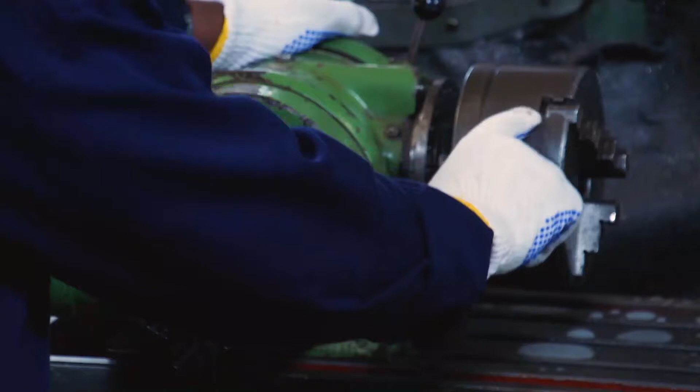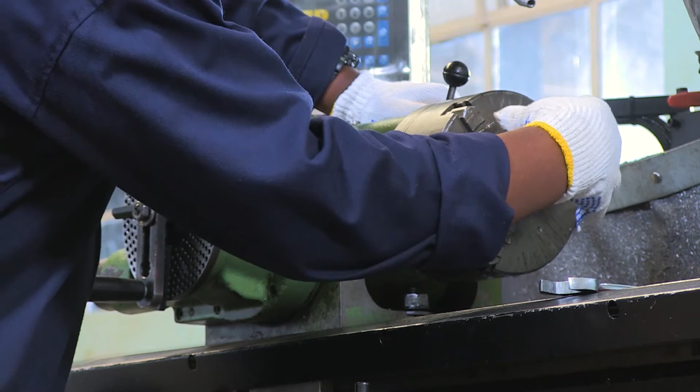So the elements of the dividing head: this part is the dividing head. Here we have what we call the dividing head, and this part is called the spindle of the dividing head, where you fix the job. Do you see these jobs like the lathe machine has? It's the same. Here is where we fix the job.

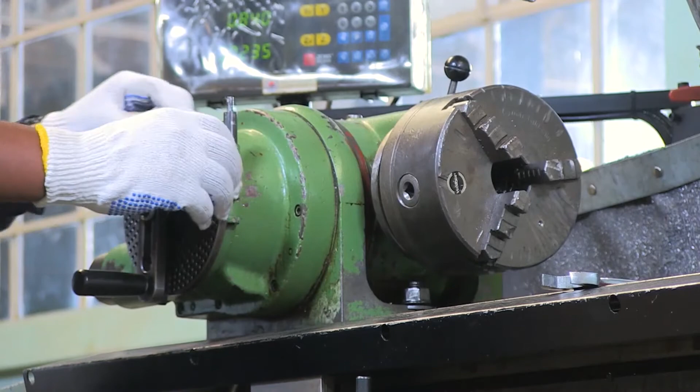And also here we have what we call the indexing plate, a very important part of the dividing head which is used to calculate or account for equal spacing. And here we have what we call the crank pin. This part is used for transmitting the motion via the worm shaft to the worm gear, then we get the output motion, but some calculation you have to look at before. And also here we have the dividing lock. After dividing, you lock the dividing head to avoid rotation during the cut. So those are the main parts of the dividing head.

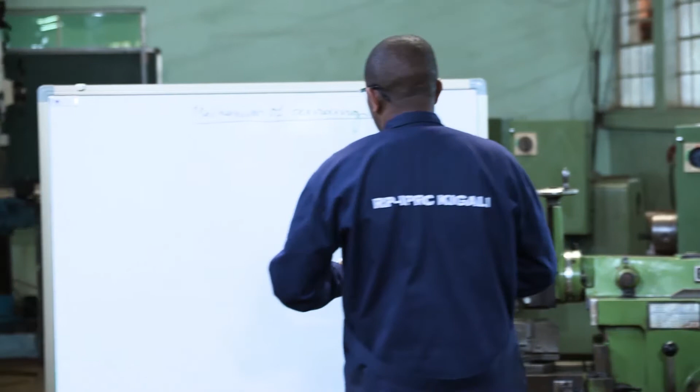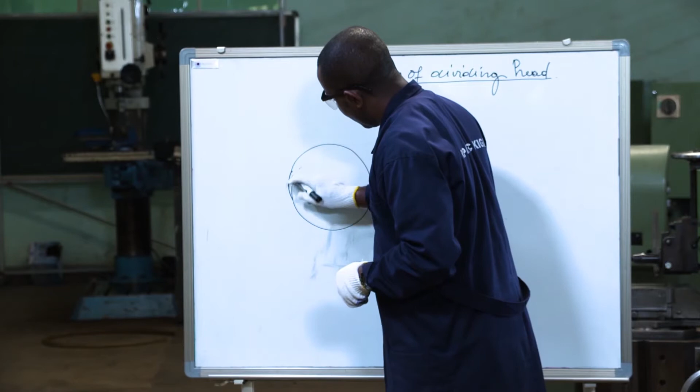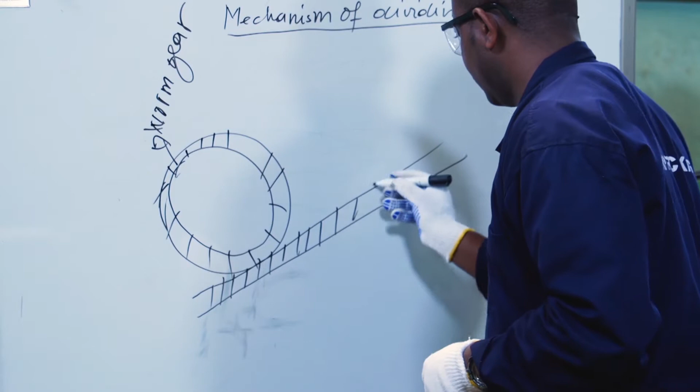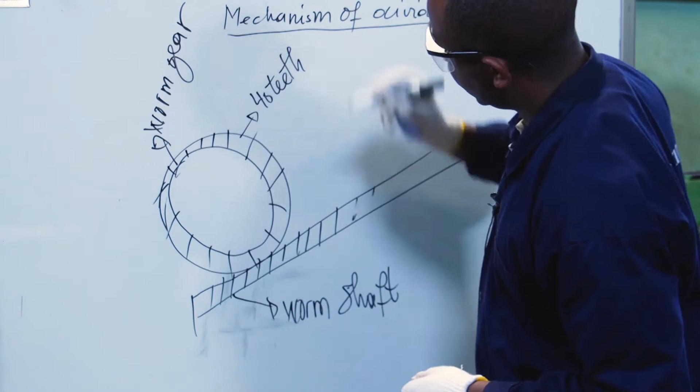Now we're going to see how the mechanism of the dividing head works. The dividing head is composed of the worm gear, which is engaging the worm shaft. This is called the worm shaft. This worm gear has 40 teeth of transmission. Here is where we have the dividing head spindle, of course with the indexing plate mounted on it.

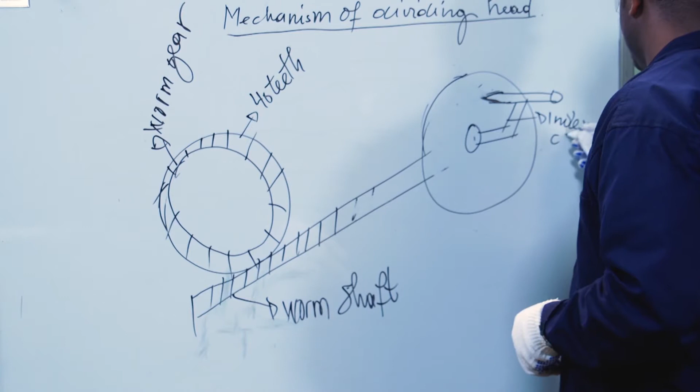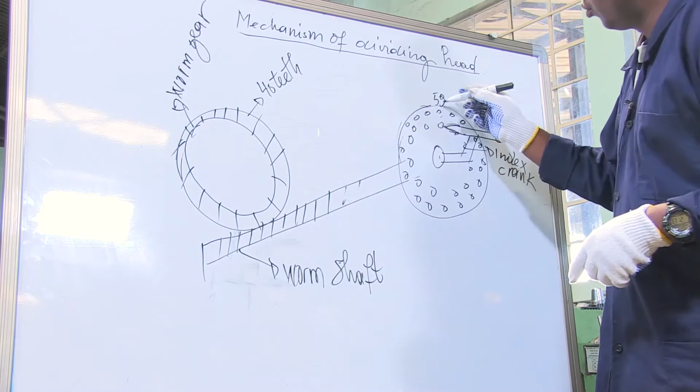Index crank. Here there is the indexing plate hole. Maybe this circle hole has 59 holes and so on. This means that when you turn one turn of the index crank, it causes the spindle to rotate 1/40 of the spindle head.

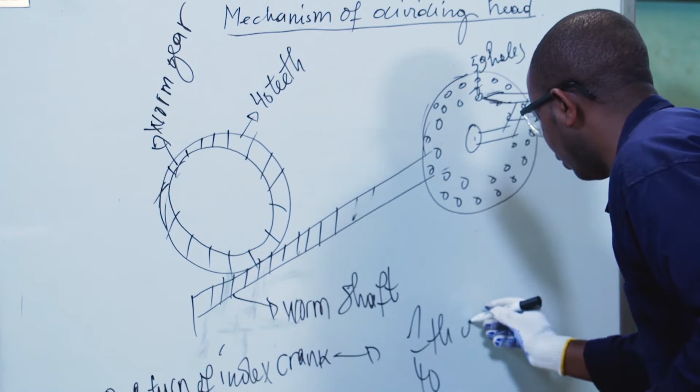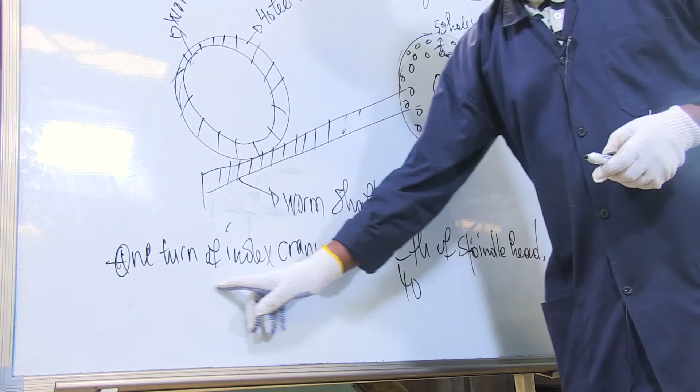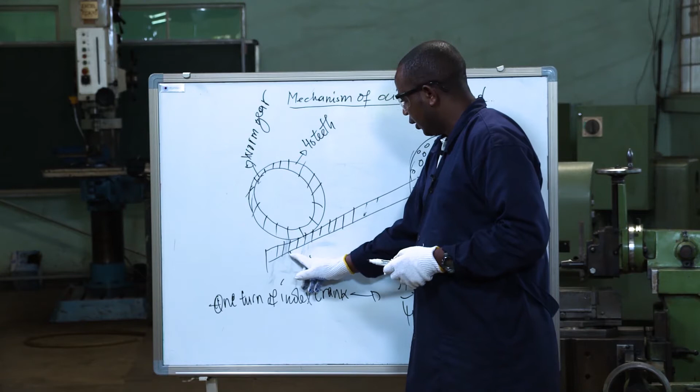This is the main principle, the main working principle of the dividing head. It means that when you turn the index crank, one tooth is engaged to the single thread worm shaft. That's why one turn of the index crank causes the spindle to rotate 1/40. This means we can deduce the general formula.

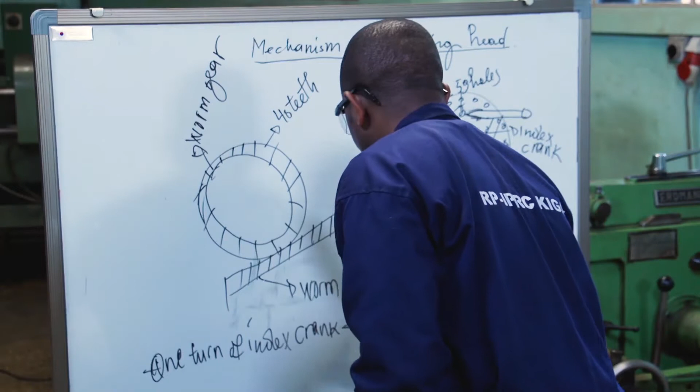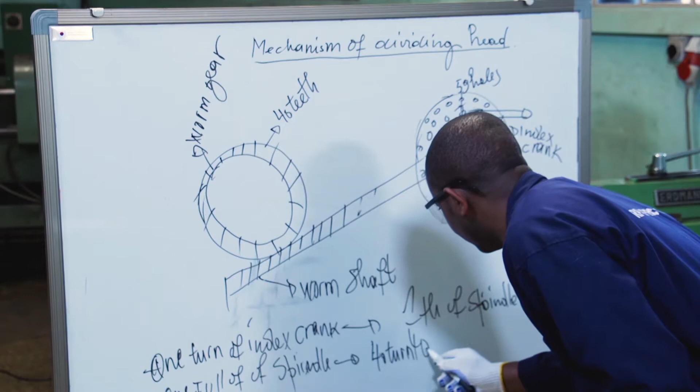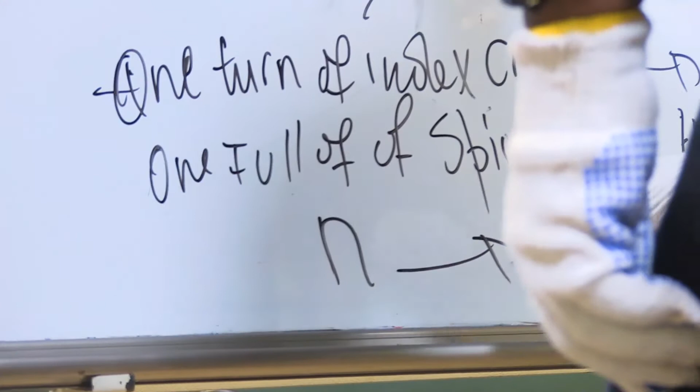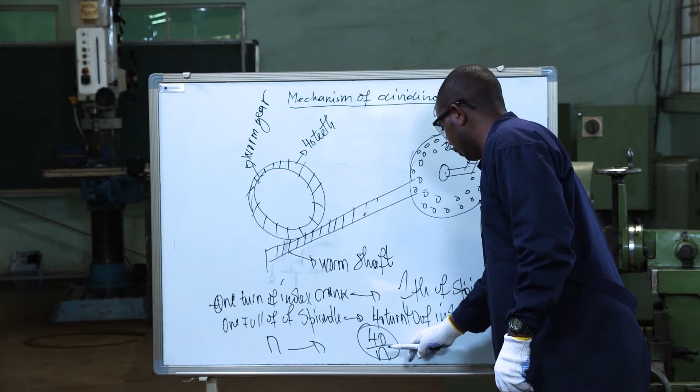One full turn of the spindle comes from 40 turns of the index crank. Then for n turns, we can deduce the general formula: the n division comes from 40 over n, where n is the number of divisions. This is a simple indexing method, as applied apart from direct indexing. 40 over n, n is the number of divisions.

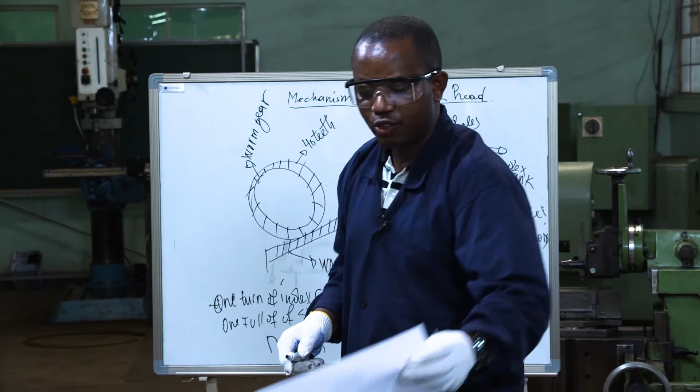So the task we have is to produce hexagonal head bolts, meaning we have 6 equal sides. So we can calculate.

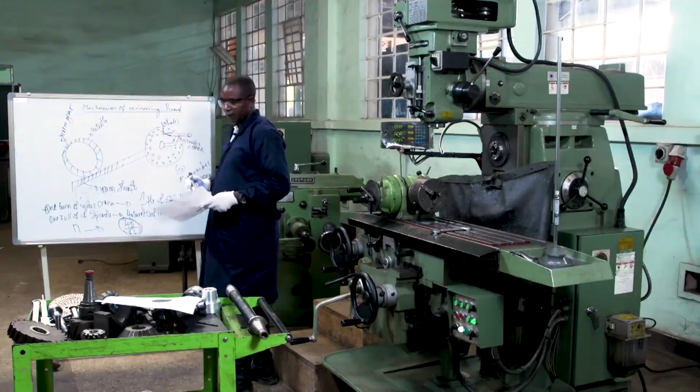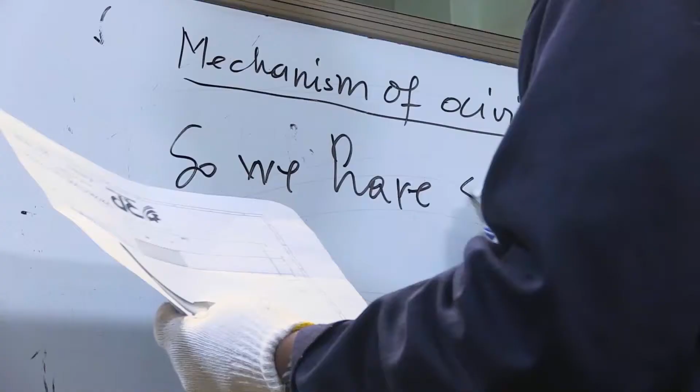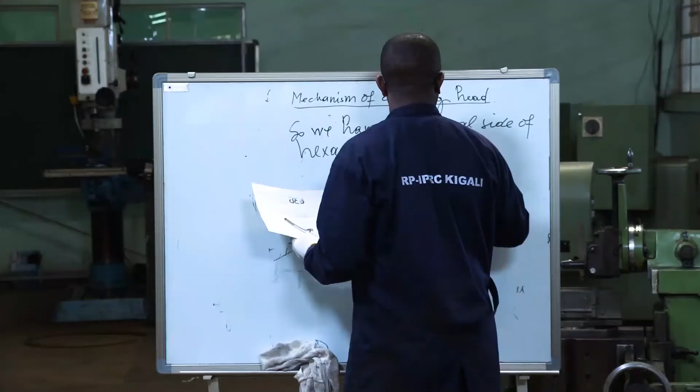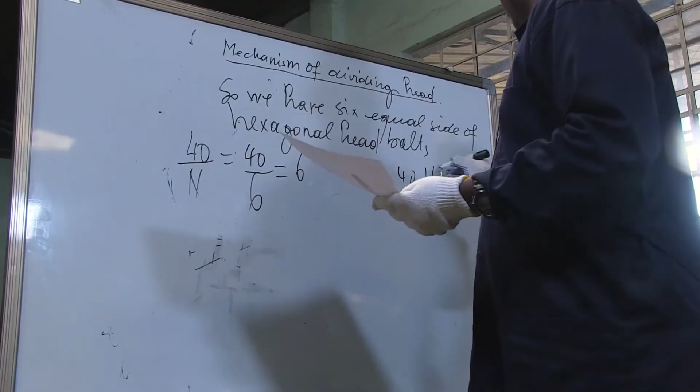So we have 6 equal sides of hexagonal head bolt. The formula says that simple indexing method 40 over n, I explained where, means that 40 over 6, because we have 6 equal sides, the number of division. Then we get 6 and 4 over 6. Here, never write a decimal number, a fraction of a fraction.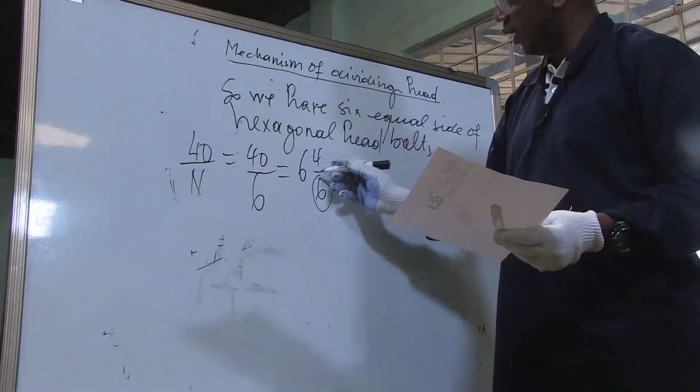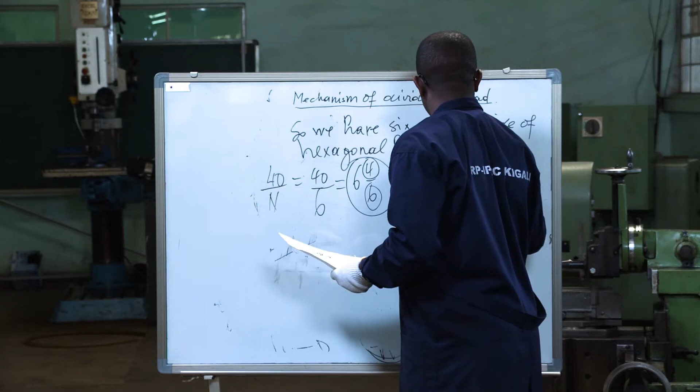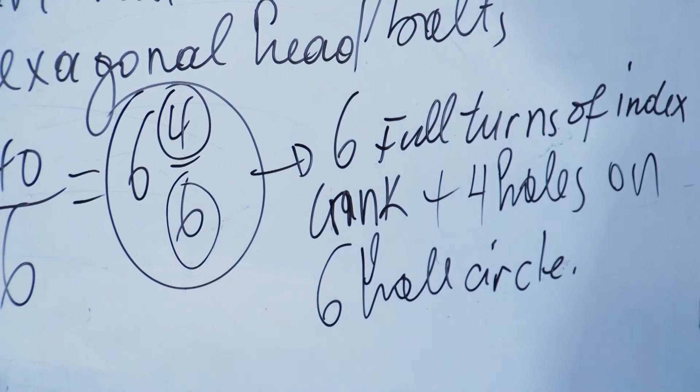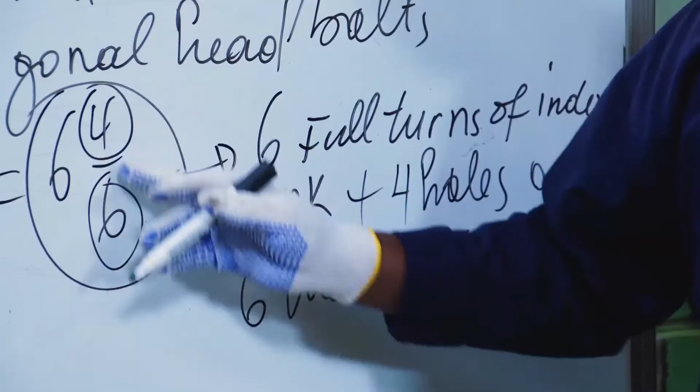It's very critical because there is a meaning of this denominator and a meaning of this numerator. We can interpret this: it means that 6 full turns of index crank plus 4 holes on 6 hole circle. I can explain more of that. So this fraction, 4 over 6, means 6 full turns of index crank plus 4 holes on a 6-hole circle. That is the meaning of this fraction.

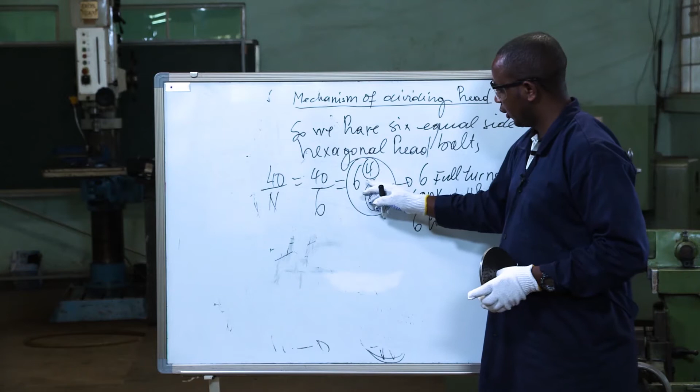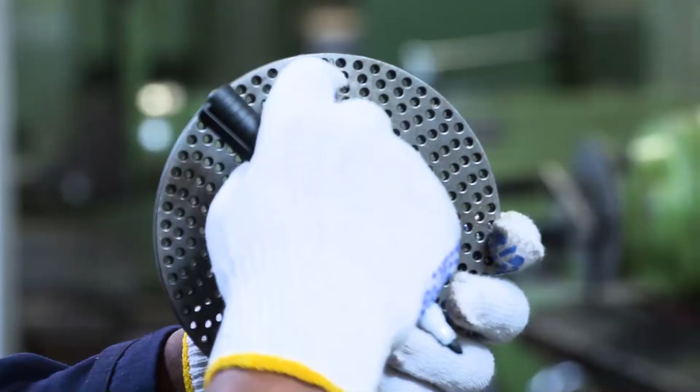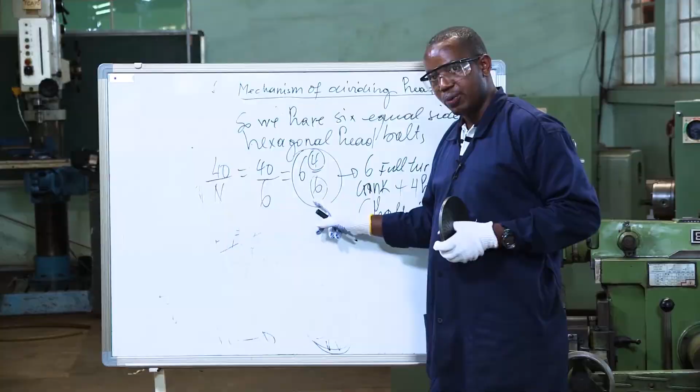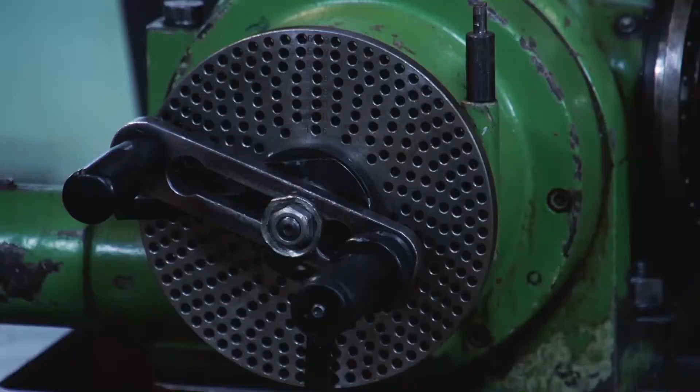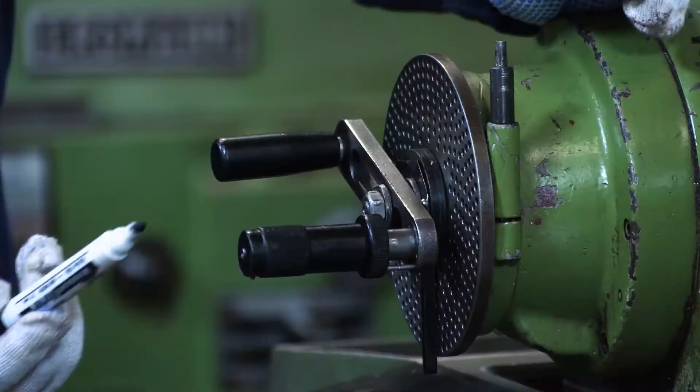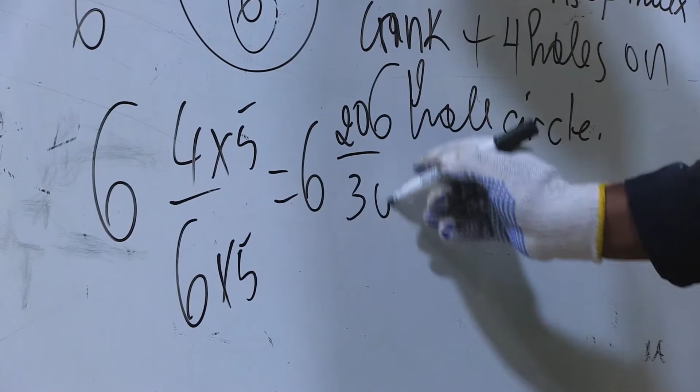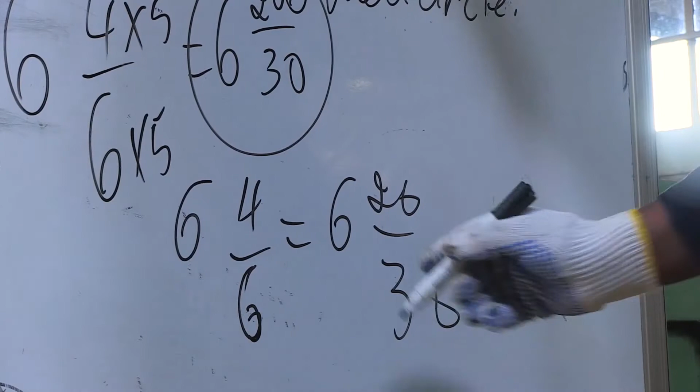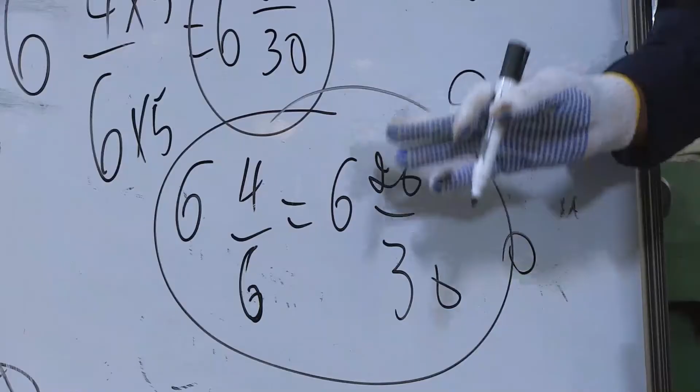Cycle hole means that we multiply both numerator and the denominator by 5. We get 6 20 over 30. 6 4 over 6 is equal to 6 20 over 30. This is my question: 6 4 over 6 is equal to 6 20 over 30. This fraction is equal because when we simplify by 5 and 5, we get 4 over 6.

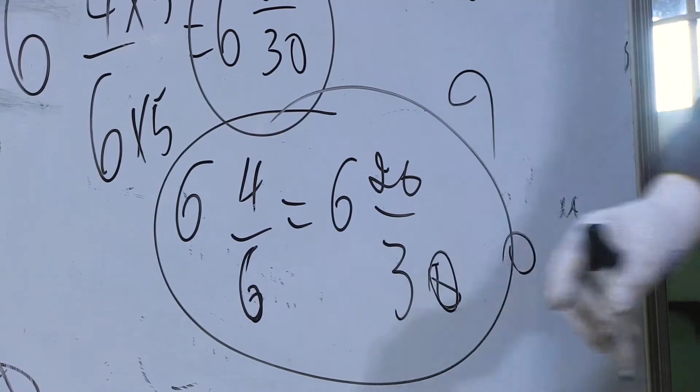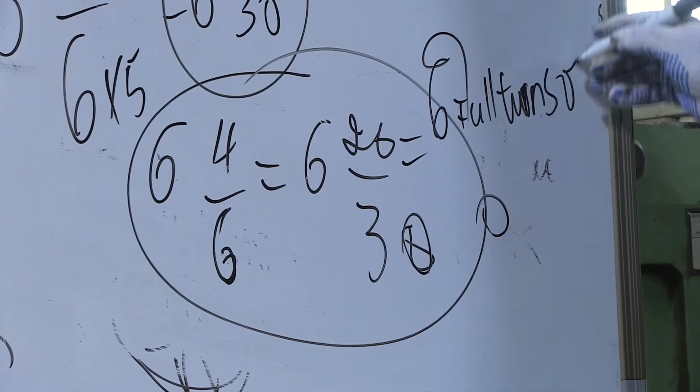There is no change, but there is a possibility of selecting the hole circle based on the availability of the indexing plate. We can apply this fraction, but there is no change for calculation, only to match with the availability of the indexing plate in our workshop. This means 6 full turns of index crank plus 20 holes on 30 hole circle.

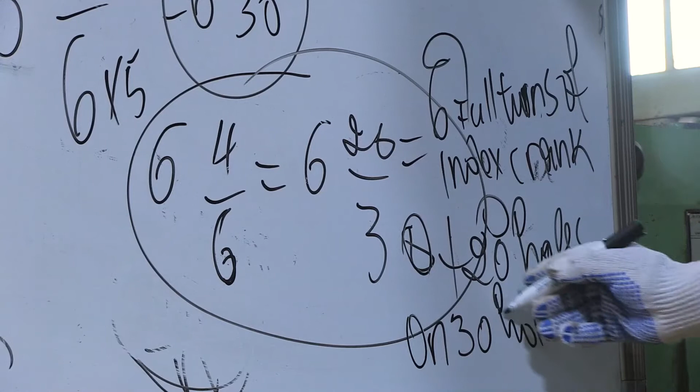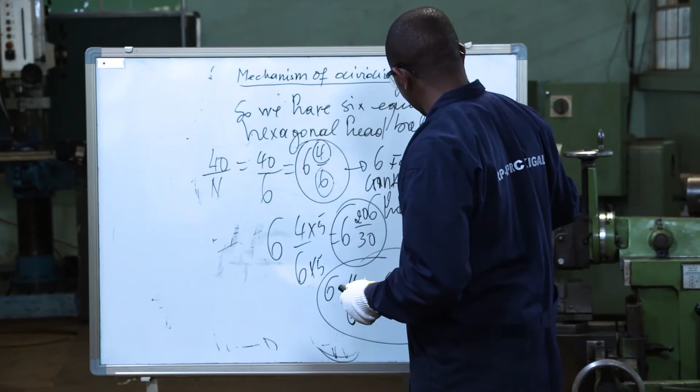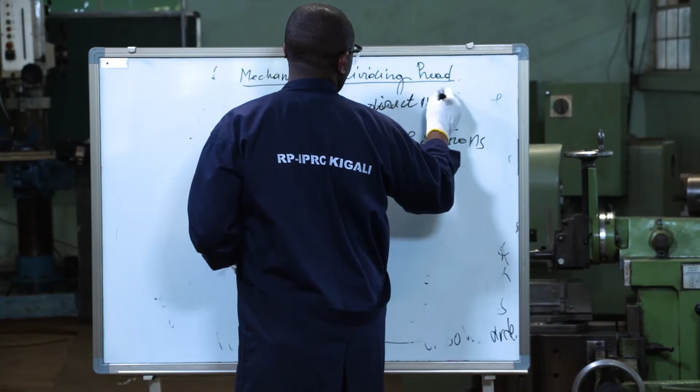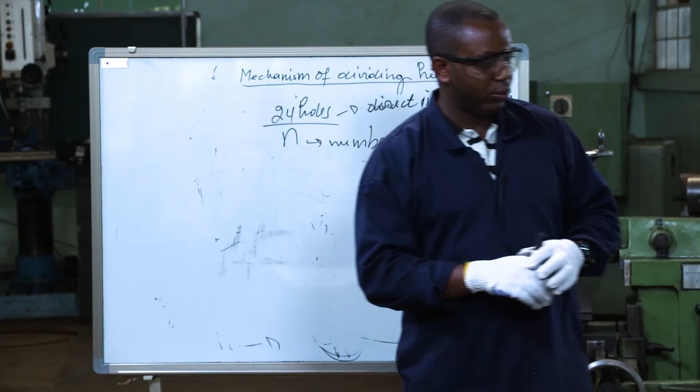Not only this method for making the hexagonal head bolt, but also the direct indexing method. The direct indexing method consists of using the indexing plate of 24 holes divided by number of division. So the direct indexing plate consists of the indexing plate of 24 holes, which is located here. The direct indexing plate is mounted before the indexing head spindle, meaning there is no gear ratio calculation. It is calculated directly because no gear ratio calculation has to be accounted here.

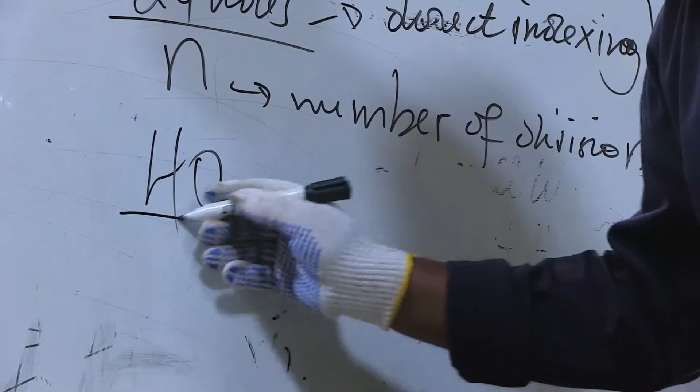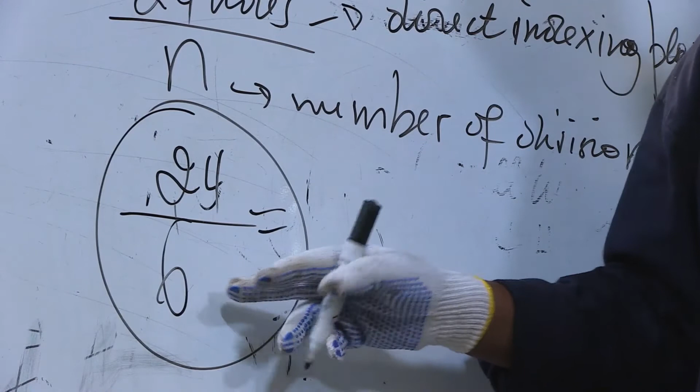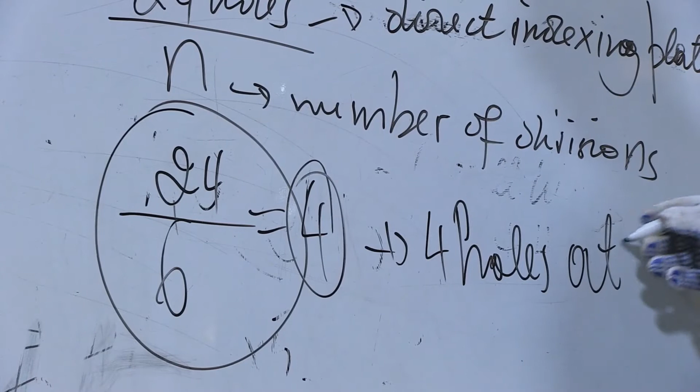Only consider the reference hole. When you start, use the direct indexing pin to the direct indexing plate as the reference, then you start to count. For example, to make a hexagonal head bolt, take 40/6, is it divisible? No. I mean for 24, 24 divided by 6 is equal to 4. Here we have to account 4 holes at each side cutting. That is how we proceed with the direct indexing method.

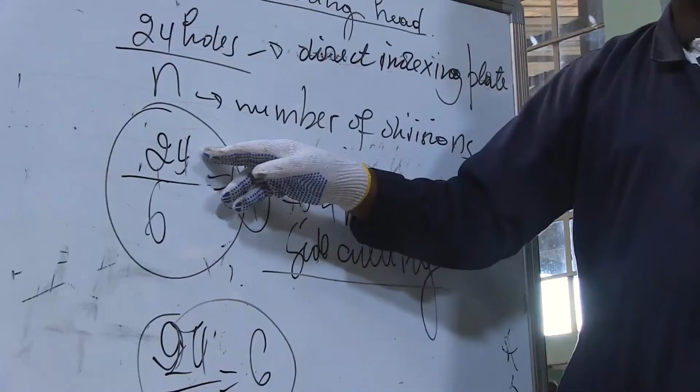It consists of a 24 holes indexing plate, and any number divisible by 24 can be applied to this method. If you want to divide, for example, 24/4 is equal to 6, and even here it should be applied. Here there is a limitation: if there is a number of division which is not divisible by 24, there is a limitation because the small number is not used. This is where we introduce the simple indexing method, 40/n.

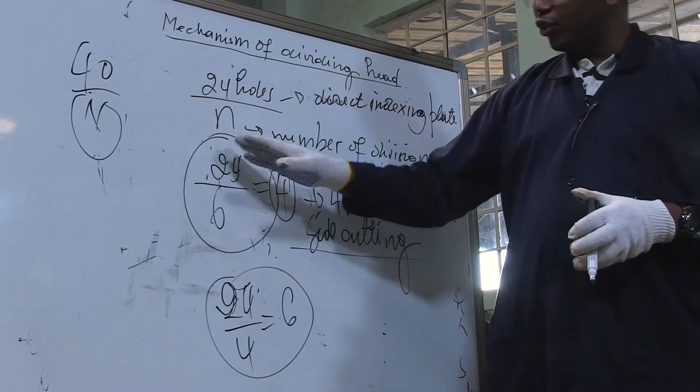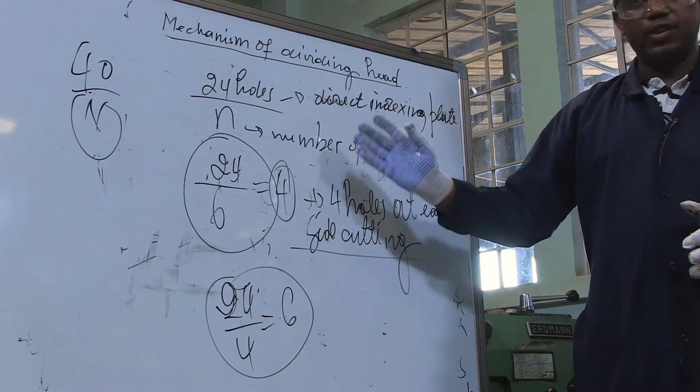Then indexing plate technology should be applied here. This method is limited to the number of division up to 24, but under some conditions limited here, apply this method. Not only those methods, but other methods should be applied. But at your level, you must use well the direct indexing method and the simple indexing method, or plain indexing method. So now we start the practice of making hexagonal head bolts.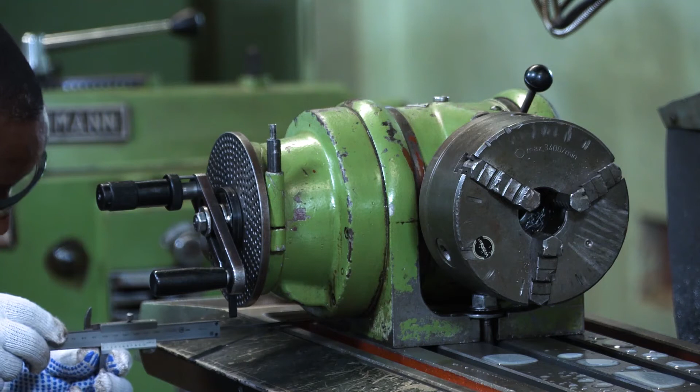First of all, make sure the dividing head is fixed well. How the dividing head can be fixed well is to check if it is fixed in parallel to the table of the milling machine. Make sure the dividing head is fixed in that condition, parallel to this T-slot of the table. Make sure this side should be parallel. You can check by using the vernier caliper by this method, where you can check this side should be equal to here, to check the parallelism.

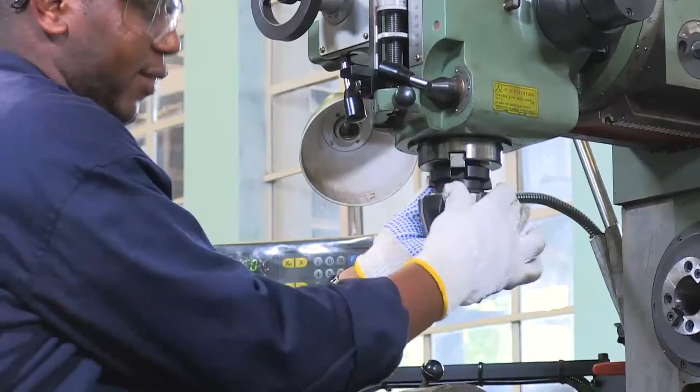What is next is to mount the milling cutter reserved for facing operation, because we are producing a flat surface as the side of a hexagonal head bolt. That's why we fix the vertical milling machine cutter, so that we can perform that operation to produce a flat surface of hexagonal head bolts. That's why we choose this specific milling cutter. Tighten well.

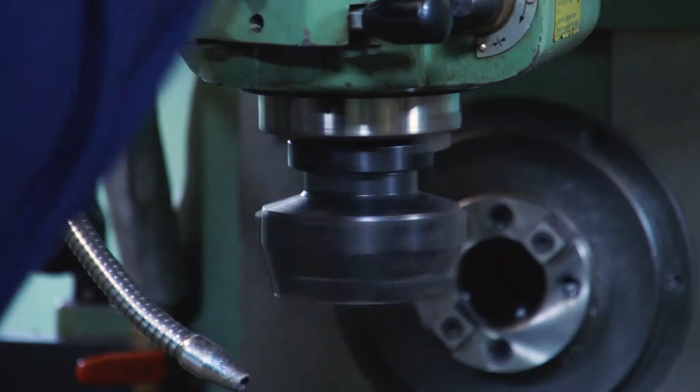So now the cutter is well fixed in the milling machine. Here you have to choose the direction of cutting. One factor for choosing the direction of machining is to see the direction of the inserted carbide cutter, how it is. It is clockwise direction, that's why I choose the clockwise direction. So this is the right direction of machining. This depends on the geometry of the inserted carbide cutter. If you choose the wrong direction of cutting, the cutter will wear very quickly and cannot cut properly.

Here we have to make clearance position. Clearance position of the workpiece means approaching the workpiece near to the milling cutter. Before approaching the workpiece to the milling cutter, there is a gap between the cutter and the job, that is the clearance value. It is better to stop a bit away, then use manual control to avoid accidents.

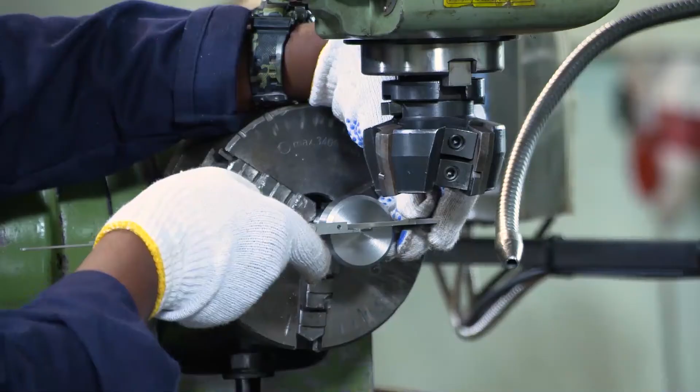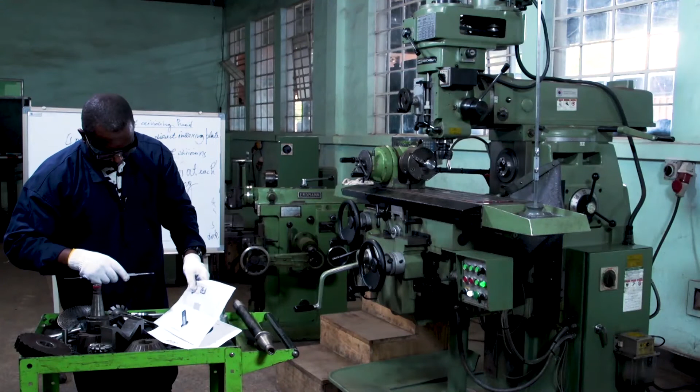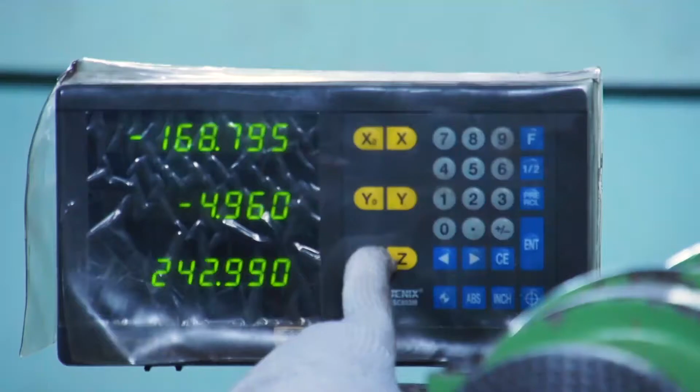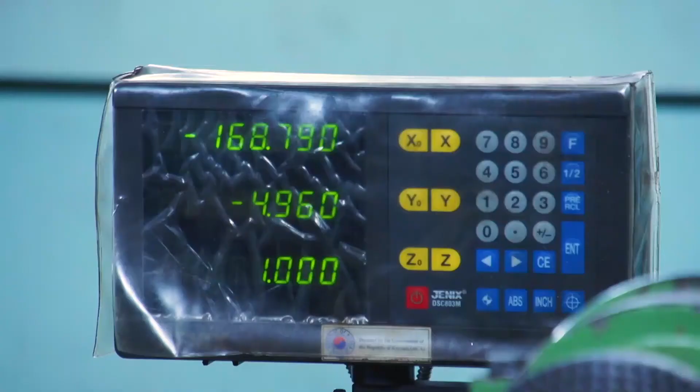Zero touching to the workpiece. Okay, do you understand the sound? Zero touching. We set the z-axis to 0 so that we can read the measurement. As long as we set the depth of cut, we can read here - this is very helpful. So now we can take 1 millimeter, set the depth of cut of 1 millimeter. You see, 1 millimeter should be removed.

Let the coolant spray on, then take the feed. Now the machine is cutting the side of the hexagonal head bolt. 1 millimeter has been removed. Then we take 2 millimeters at once. Take the feed very carefully, based on the material being machined - if it is hard, go slowly; if it is soft, go very quickly.

Now indexing, direct indexing. Unlock the indexing lock. Then we are going to count 4 holes for cutting the next side. As our calculation said, for direct indexing, 24 divided by 6 is 4, meaning 4 holes at each side of the hexagonal head bolt. 1 hole, 2, 3, 4.

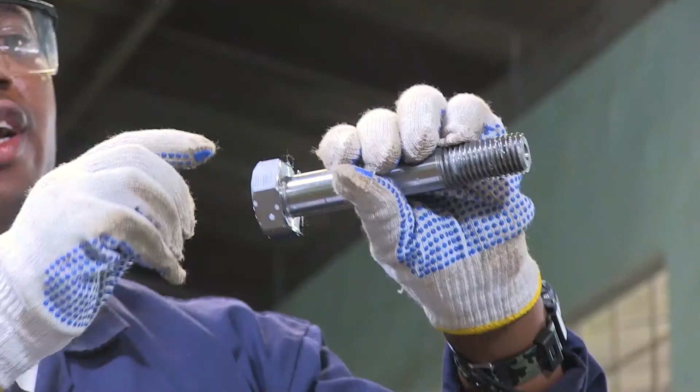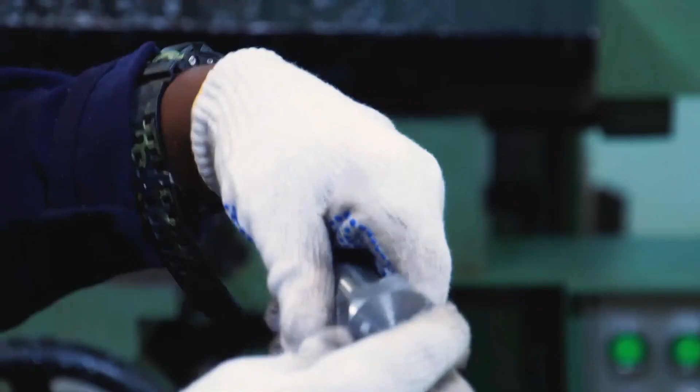Hexagonal head bolt: 6 equal sides have been produced by milling machine, performing face milling operation using the special accessory of the milling machine, called the universal dividing head. Now every student has to be able to produce the bolt.

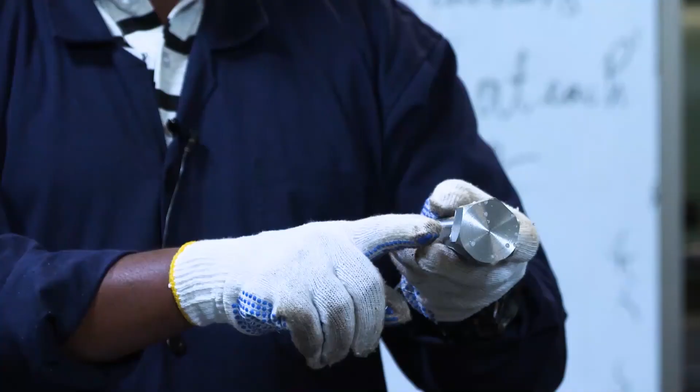Here you can clean it using a file. I think you have been taught well in bench work, that's why bench work first, then you clean your work after production. Okay? So next time we can close here with this job.

So I want every student to be able to produce a standard bolt. Of course, there is a need for lathe machine operation and also milling machine operation by performing face milling operation. Okay, thank you. So next time we'll see how to produce a gear by applying a simple indexing method, since here we have applied the direct indexing method.